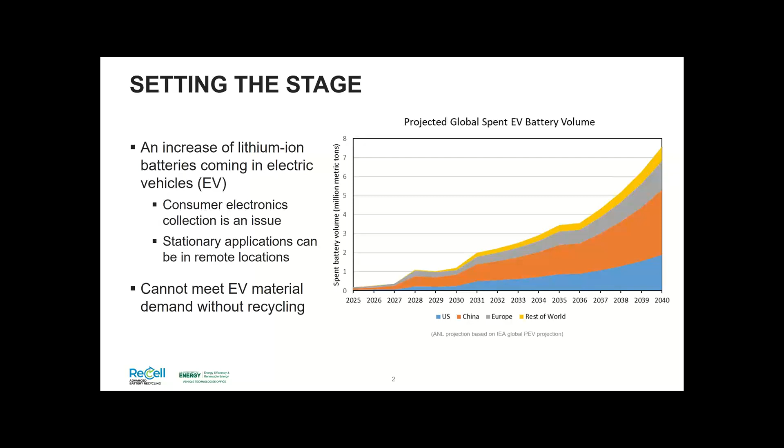I also want to point out that recycling is critical to the material supply chain for our lithium-ion batteries. We don't have enough cobalt, essentially. We can always dig deeper, but it's really the amount of cobalt projected that's required for these batteries really digs deep into the amount that we have available to us in this world. And so we need to make sure that we recycle in order to have these materials. So that's my long setting the stage slide. Let's move on.

So you can, as I mentioned, currently recycle lithium-ion batteries, and very effectively. All of the processes that are out there now are better than digging the materials up and refining them and putting them into batteries and throwing them out. So we want to recycle lithium-ion batteries, if not just for the supply chain issue that I talked about, but emissions are much less.

A lot of the materials come from sulfur-based ores, and so when you produce them from the ground and refine them, you produce a lot of sulfur emissions, and that's problematic. Once you've gotten the sulfur out, when you recycle that material, you don't have that emission. So recycling, again, is a great environmental opportunity.

So let's see. The processes are pyro-based and hydro-based, and I'll refer to that a few times through this talk. But pyro basically means fire or heat. Hydro is aqueous solutions, so acids typically. Well, I'll tell you now. So pyro, you're going to take your battery, you're going to throw it into a furnace, you're going to burn the organics. You get that heat, which is great, but it's gone now. So things like your solvents in your electrolyte, your plastics, carbon, graphite, that'll all get oxidized.

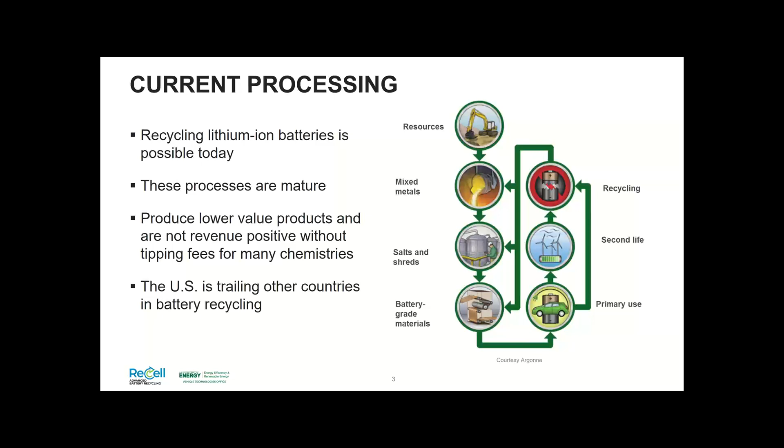So the ReCell Center was established as basically an advanced battery recycling group, I guess you could say, that is working towards, and I'll show you in the next slides, cost-effective battery recycling. It's led by Argonne National Laboratory, which is where I work, but it also includes the National Renewable Energy Laboratory and Oak Ridge National Laboratory, and then we have 3 universities as well.

So the ReCell Center's mission is to decrease the cost of recycling lithium-ion batteries. I should underline that, decreasing the cost of recycling lithium-ion batteries. And that is to ensure the future supply of critical materials, a hot topic these days, and decrease energy usage compared to raw material production. I have this picture in here because this is where vehicles come to die. Actually, I should say be reborn. Because it is a very circular infrastructure.

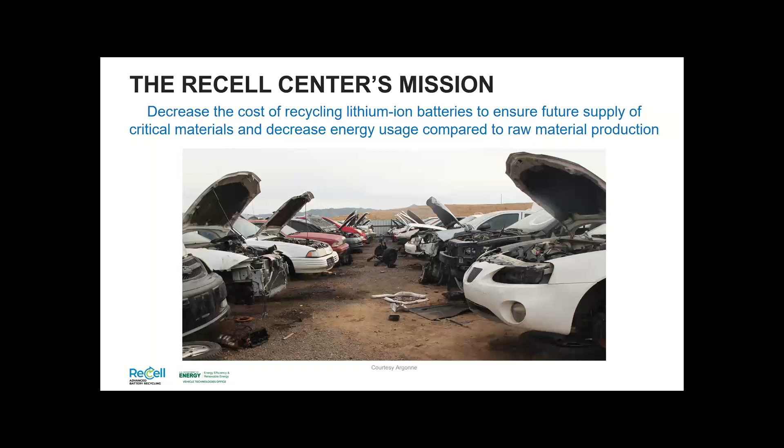Like I said, recycling, no matter how you do it, is of great benefit to the environment. If we can just have an incentive to really make this system work, we need to drive the costs down to process these batteries. And so anyway, there you have it.

So the ReCell Center, the purpose, but really the hope is to foster the development of cost-effective, environmentally sound processes to recycle these, and really to bring people together from all around the country, all around the world, to bring their piece of the puzzle. I always talk about this as a puzzle, and I assume people get tired of me talking about it, but so be it.

There's a big picture that needs to be put together for this all to really work. And there are people working around the country and around the world on little bits of this process. They may work on relithiation, which is, I won't go into what that is, but they're just focused on relithiation. Or they're into material separation, things like that. But we need to get everybody together to put these puzzle pieces together to make this big picture.

And I'm hoping that the ReCell Center is a platform, and so far it's been great, getting people connected with their ideas, their concepts, and getting this picture put together more efficiently. And then all the great stuff comes, right? Reducing the use of our limited resources, reducing energy consumption, increasing our national security, bolstering our supply chain.

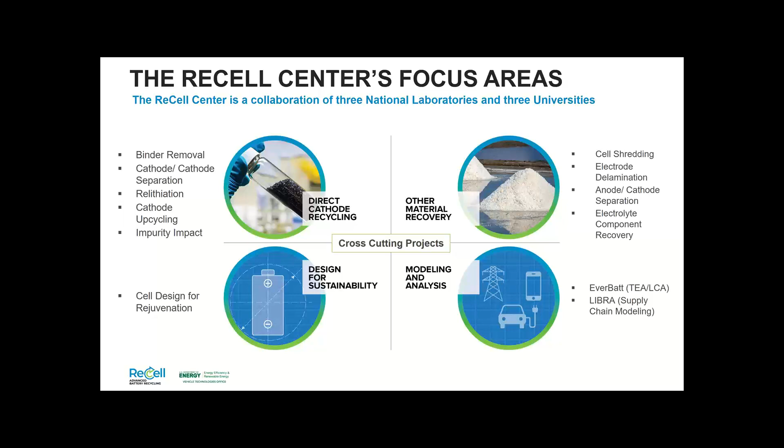Pyro takes the material all the way back to a metal. Now, let me step back a second and say all of these processes, cathode production, it's a very precise chemistry. You want to have a material that the lithium can shuttle back and forth easily, and so there's a lot of science and processing involved in making cathode materials. So at the end, what they do in pyro is basically you melt it down to a metal. Then you have to go all the way through the process again of making it into a cathode material.

Same thing with hydro. You're going to get a metal salt back, and then with those metal salts, you need to go all the way back through the cathode manufacturing process, which adds cost and time and materials and wastes. And so the concept of direct recycling is take the cathode out of the battery, fix it while it's still a cathode. Don't ruin the chemical structure that all that effort was put into to make. Fix it as a cathode, and then put it back into the battery.

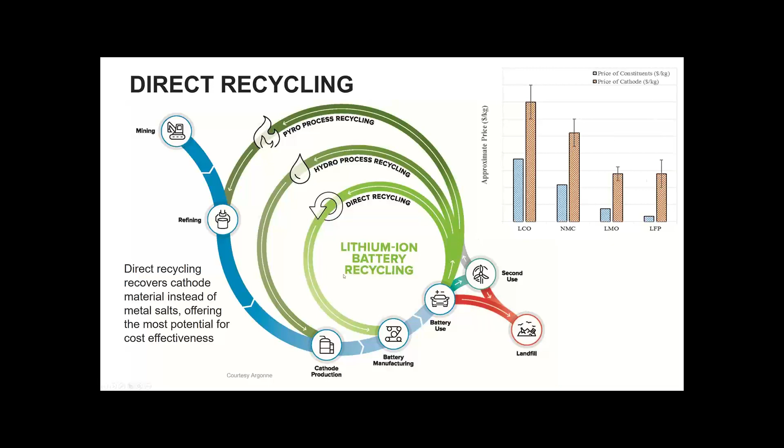To have a direct recycling process, I'm going to skip the processes of pyro and hydro really, but a lot of them are similar. At the end of life, we're going to shred the battery. To liberate the materials, we need to do something with the electrolyte, and that's a solvent and a salt. The solvent is a low value material, but we have to get rid of it somehow, so we either throw it out or maybe we have a product that we can recycle.

The salt is a higher valued material, one of the top 3 valued materials in a battery, so we're working on methods to recover the salt that can be then reused, hopefully back into a battery. After we get that out, we have to separate the anode and the cathode and the metal foils that are on those materials. If we just focus on the cathode, we still have carbon black and PVDF.

Carbon black helps with electrical conductivity. PVDF binds the material together and makes it stick to what we call a current collector, so that we can take these electrons and have them push or pull through the system. We remove the carbon black and PVDF, whether it's recycled or whether it's destroyed.

And then we need to do this relithiation typically, because in the system, when you make a battery, the cathode starts out with a lithium on it. And then when you charge it, it transfers over to the anode. So we need to relithiate that material, and then upcycling. So that's the idea of making it perform rather like batteries of today.

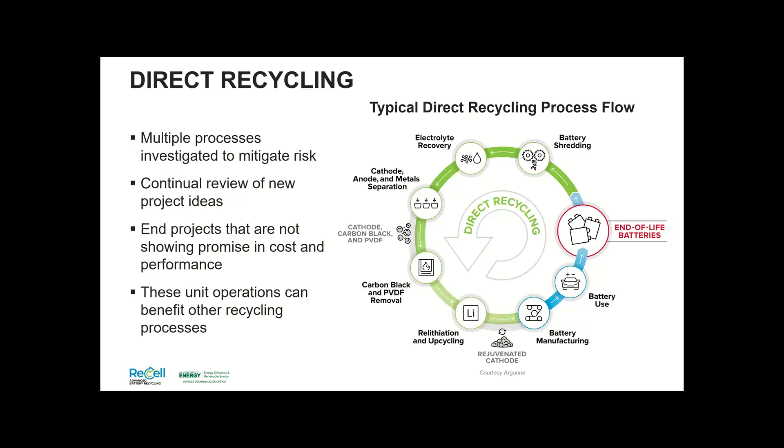Manufacturing scrap is a great place for us to start the demonstration of direct recycling, and that's because it gets rid of some of the challenges that we need to address that will take more work to scale up, I guess you could say. So if we work with manufacturing scrap, we now don't have to deal with this 15-year-old chemistry. This is today's chemistry that we're working on.

We also have the option of saying, I'll just take the cathode laminates. I won't have a battery. And so that's even easier. So we're working with some companies now actually to demonstrate the direct recycling concept. And this is really huge because right now there's a lot of waste in the manufacturing business of batteries, at every stage of the way.

So basically the powders can be mixed wrong, and I focus on the cathode here, but this is true with the anode as well. They could be mixed wrong. Once you get it into a slurry and you cast it, there could be streaks in your laminate. Maybe it's an uneven depth. Things go wrong, and so they get kicked out. Actually, let me stop and go a little bit further.

Once they have the cell built, they format it and they check the performance of it. If it doesn't meet their specifications, they're scrapped. And so there are ranges, I've heard from 5 to 30% scrap generation from these processes. And it's very dependent upon how new a facility is, how new the company is. I think probably 8 to 10%. I don't have any real reason to say this, but that's where I think the real scrap levels are for the average producer. That's a lot of material.

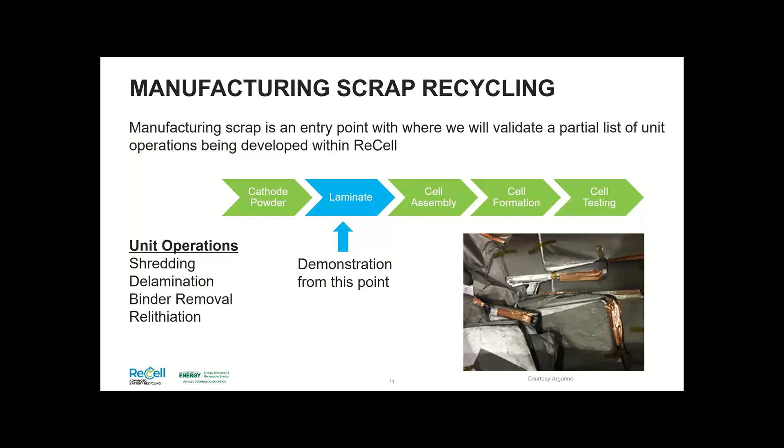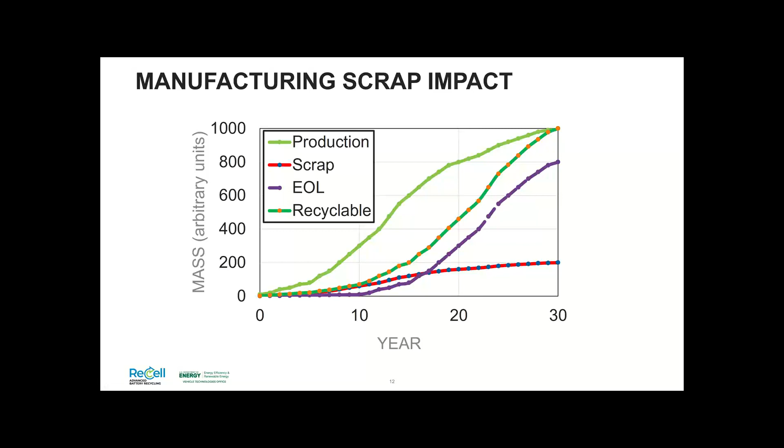EverBatt. I'm going to try and move a little bit faster. EverBatt is a model that looks at cost and environmental impacts of the life cycle of a battery. We have at Argonne BatPaC, which is battery performance and costing, and this is basically to make batteries. You can say, I want a battery that's going to go this far in this vehicle, and it says, okay, it's going to cost you this much, and these are the materials that you need. So then we take the bill of materials and we put it into GREET, an Argonne life cycle analysis tool, and that says, with those materials, we're going to have this environmental impact from processing and manufacturing those materials.

So we know what the cost and environmental impacts are of making a virgin battery. Right now, we don't have anything in the use phase, but at the end of life, we have to collect the batteries. There may be a pretreatment of some sort, but there's a cost and an environmental impact associated with that. Same with whichever recycling process you use. Depending on your recycling process, you're going to go through different routes, but basically you're going to have to make a new cathode, and you can put it back into a new battery.

So now we can look at the cost and environmental impacts of batteries with recycled content. And that's pretty cool. So the output of this is very straightforward. It's this stage costs this much and has this environmental impact. And so an example of how this can be used is to say, design for recycle, it's going to cost me an extra $1 to use bolts instead of weld this pack together.

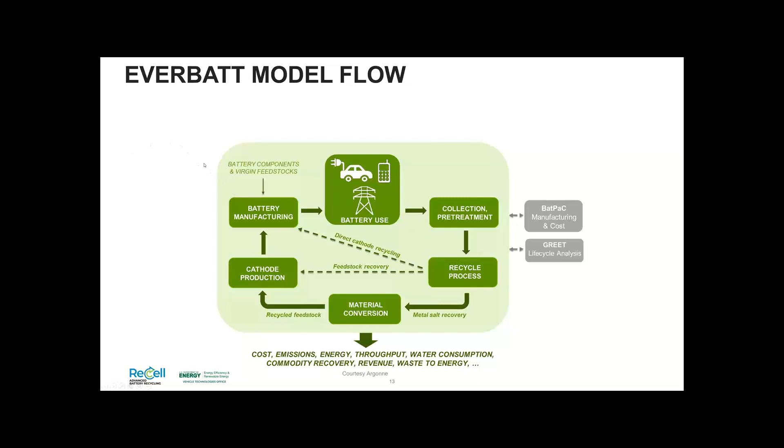So anyway, this has been a very valuable tool for us, and it's come in handy. This received an R&D 100 award in 2019. It's a new model. As far as I know, there's no other models like it that treat this whole life cycle. And in fact, we're talking now about actually including a little loop out here for the mining and supply chain aspect of it all.

So some of the parameters that this addresses are labor costs. So you can say, I want to build this battery in Asia. I'll make the powders in Asia. I'm going to put it together in the US. I'm going to recycle it in Canada, whatever it is. So the labor costs change with that. The material costs may change. You have different transportation required. So the collection distances. What equipment are you using? What's the plant life? Things like that.

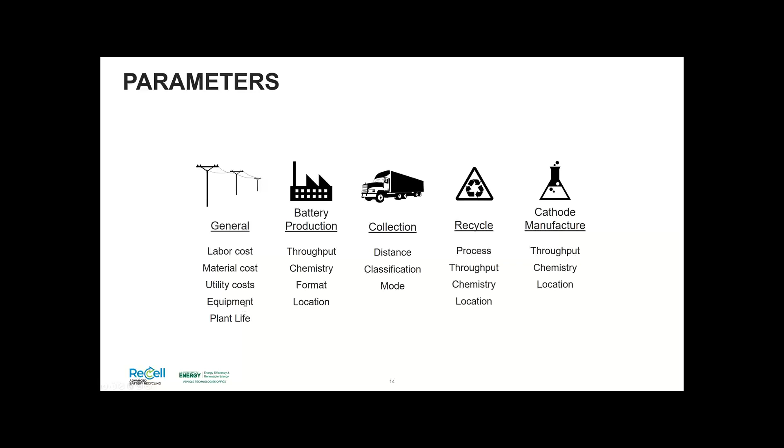The inputs are pretty easy. We tried to make it as easy to use as possible, but we balanced it between really getting down into the weeds and user-friendly. So we're somewhere in the middle. But basically, if you want to look at transportation, you can say from the end use to the collection point. So that's like from my house to Best Buy to the drop box, 20 miles. And collection to the recycler, well, we need to go to Ohio, and so it's going to be 1,000 miles, say. So you can enter all this stuff in.

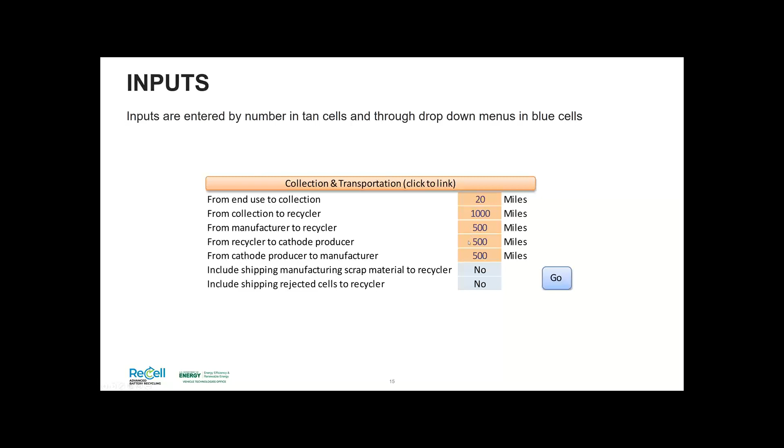You hit go, and actually you can say this is going to be by car, this is going to be by truck, this is going to be by air, this is going to be by sea, or a combination thereof.

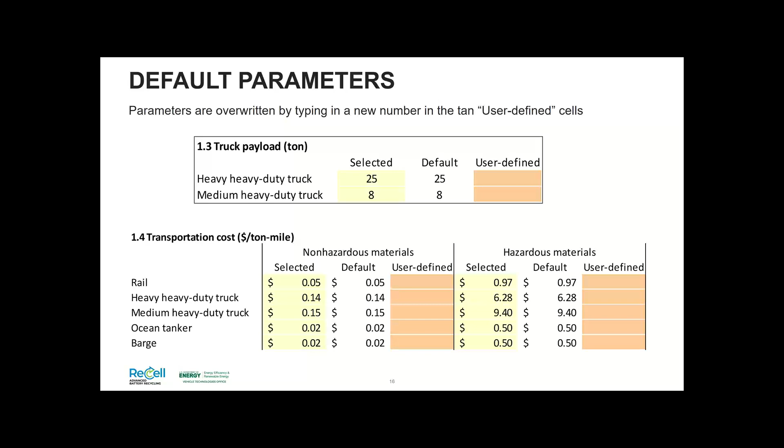Again, we have just default information in here. At any time, you can change the information because a lot of the times we don't know the answers, but you may have insight into, I know rail's not 5 cents, it's only 4 cents, so you can use that. There you go. Here's the simple output, and this is one example.

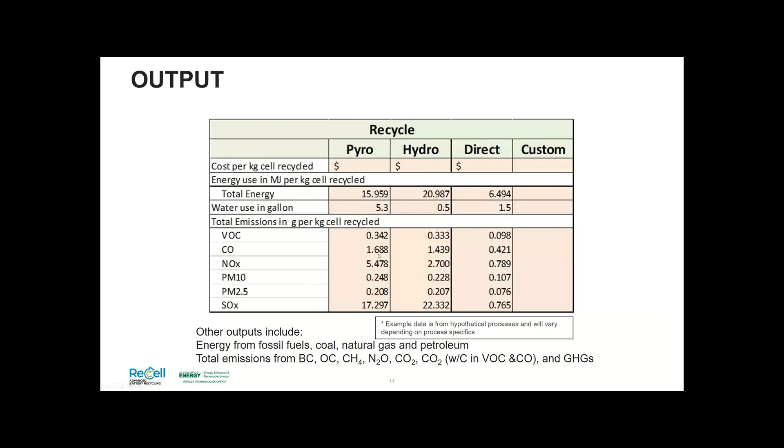Or you could be looking at the manufacturing of the battery, the collection of the battery, the recycling of the battery, and say, wow, this is the big part of it all. There's also energy consumption and emissions. This is a truncated example, but you get the idea of the information that comes out of this. Oops.

Okay, so finishing up just in time. We have some labs. We now have a total of 3 labs. This is a part of the Materials Engineering Research Facility at Argonne National Laboratory. So that's really an optimization and scale up. So we're developing new technologies, we're optimizing those processes and scaling them up. We have high bay space for larger equipment. We have bench scale equipment in labs. This is an old picture. And then we have another pilot scale lab that I don't have pictured here. Let's see.

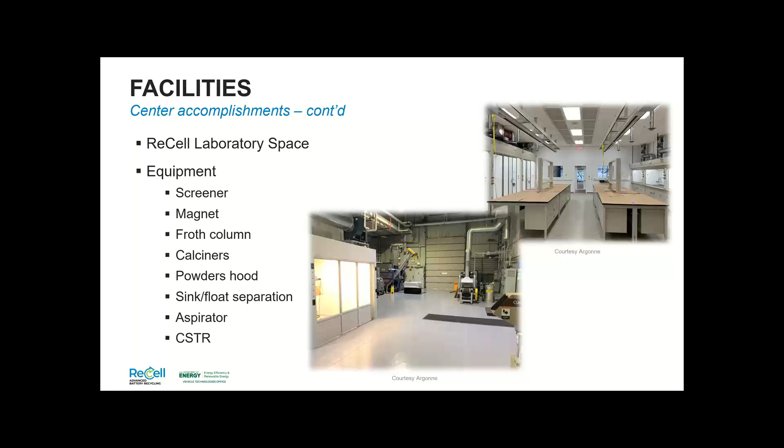One thing that I think is important to ReCell in general is what our job is. Our goal is to come up with technologies that say, hey, direct recycling or whatever it is can benefit the United States and the energy security that we need. But we don't do it in the real world. We rely on industry. And so we have been working from day one with industry to make sure that they're on board with what we're doing.

Because we do a lot of cool stuff at the labs. I mean, it's really cool stuff. But if you don't connect it to industry, if you can't get them to figure out exactly what they can do with it, it's never going to really take off and go anywhere. So anyway, we've been working with industry, and I'll leave it at that.